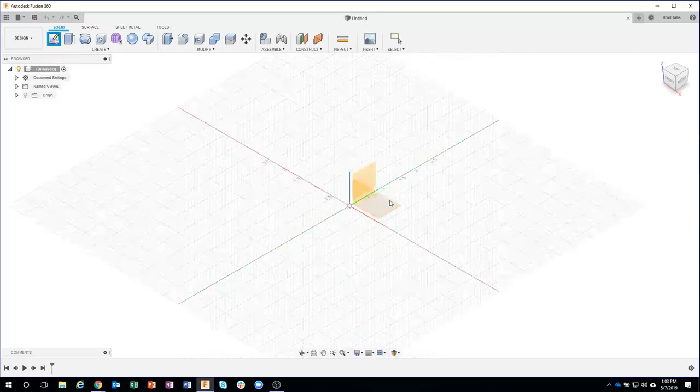So the first thing I'm going to do is, let me jump into Fusion. And I'm just going to start by creating a quick sketch. And I want to create a 1/2-inch diameter bolt, for example. So I'm going to start by just creating a circle. And I'm going to make this 0.5 in diameter. So I type in 0.5, I'll say okay. Let's go ahead and extrude this guy up. And in this case, I'm just going to go like 1 inch, for example. Okay.

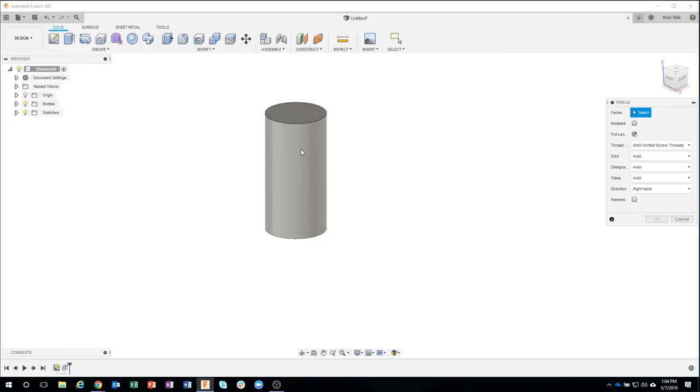Under the Create menu, we have this Thread command. And when I click on Thread, I can go ahead and select this cylinder. Now watch what happens over here. When I click on this cylinder, it actually figures out the closest manufacturable thread. So for example, in this case, I'm in inches, but if I were in millimeters, this would probably show up as a metric thread type. You can see that it determined that a 0.5 is about the closest.

And then we have different designations. So you can kind of see we have 1/2-inch 12 UNS, 1/2-inch 13 UNC. So I'm going to go ahead and do this 13 UNC, and you'll see that this preview updates. Let me go ahead and change it to something like 20. You can kind of see how that updates.

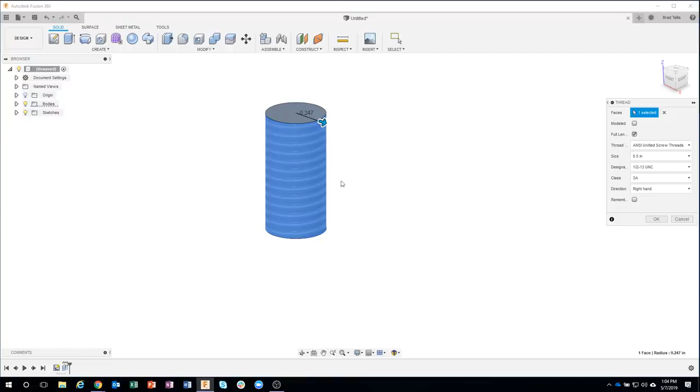Now, if I were to say okay right now, this is just a decal. It's just a sticker, basically, a representation of threads. Now, why would we want to do that? Well, when you have complex designs that might have lots of threads, you wouldn't want to have all of those modeled, but you might want to show that those are threaded rods, for example. So we use this almost like an image.

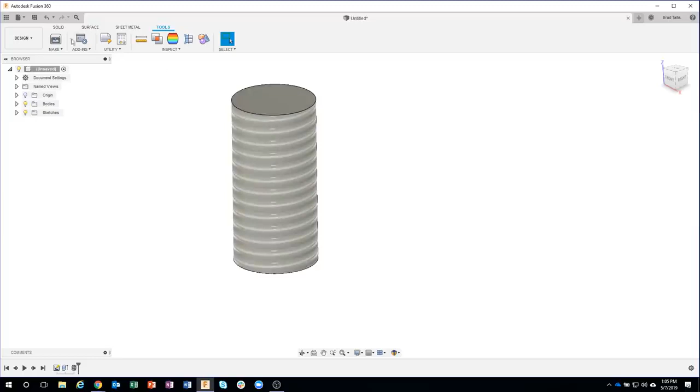However, if I were to come over here and say Make and try to 3D print this, all I would get would be a cylinder because there's physically no threads there. Okay. I'm going to go back into my thread feature in my timeline.

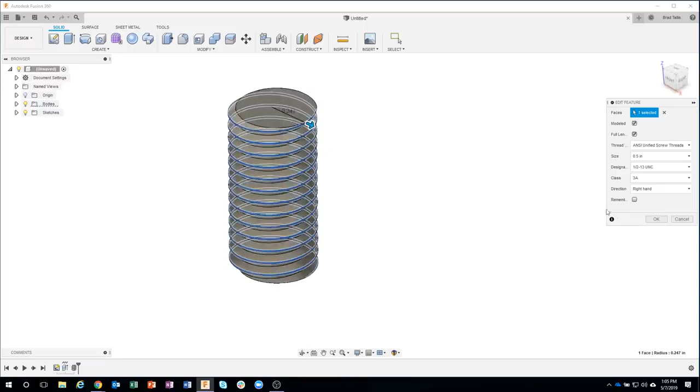Again, I'm ANSI unified, half inch 13, but you'll see right here it says modeled. If I click on that, it's going to physically model the threads. Now, by doing that, we've added a lot more edges, a lot more faces, and this is what I was talking about earlier. If we had a lot of these in our design, it could potentially slow down our session of Fusion. So, actually model the threads only on the ones that you really need to have modeled.

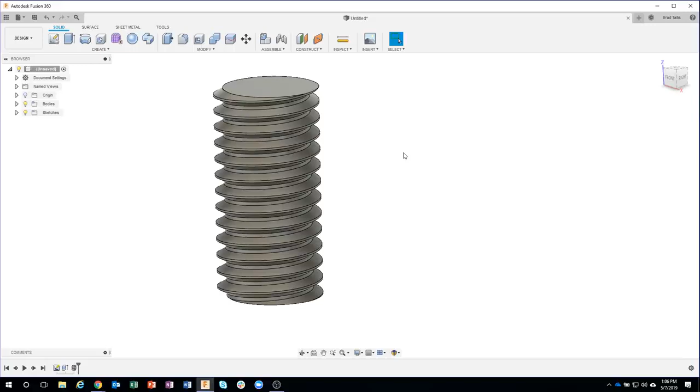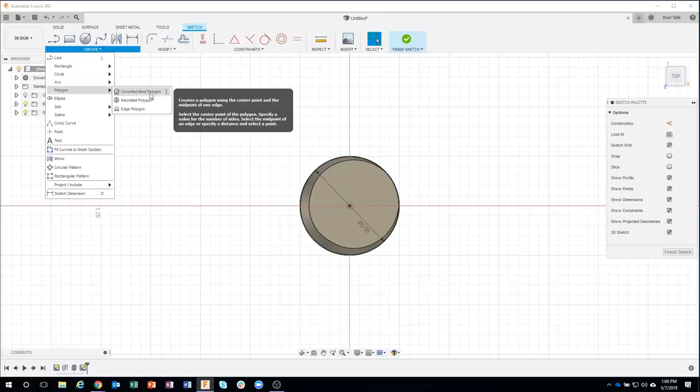Okay. So I'm going to do that again. I'm going to, this time, create a sketch on that plane. I'll do another circle here. Let's just do a half inch. And then I'm going to use a cool command in here called Polygon, circumscribed polygon. Okay. What this allows me to do is I'm going to go ahead and start in the center, and you can see that it's going to basically create a polygon that's circumscribed around the radius of our circle here.

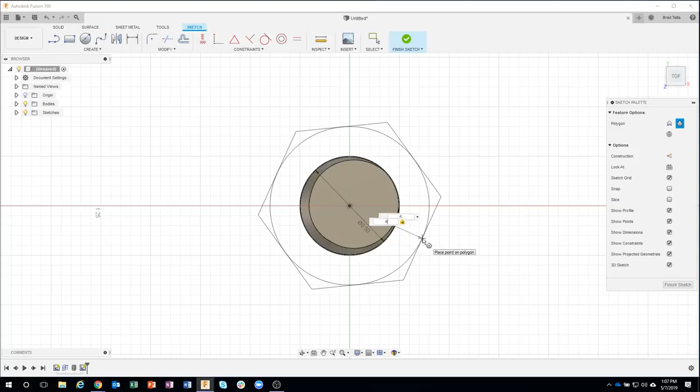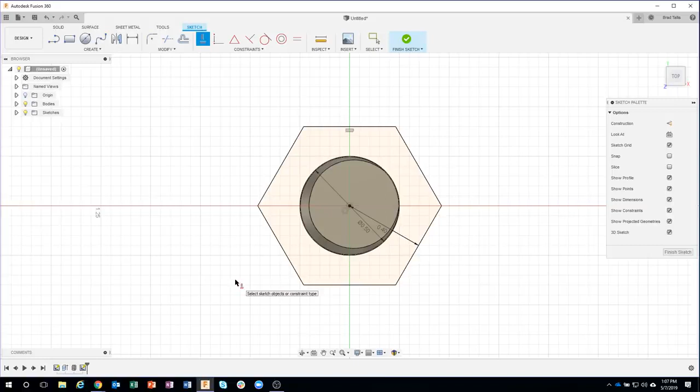So now I can make this nut whatever size I want. Let's just say 0.4 in this case. And I'm going to go ahead and just hit enter, and you can see it created a 6-sided polygon. Now, the anal retentive part of me, I like to have this horizontal, so I'm going to come in here and say horizontal, and I'll just click on that top edge, and you can see how it rotated it to be horizontal, and we are done with our sketch.

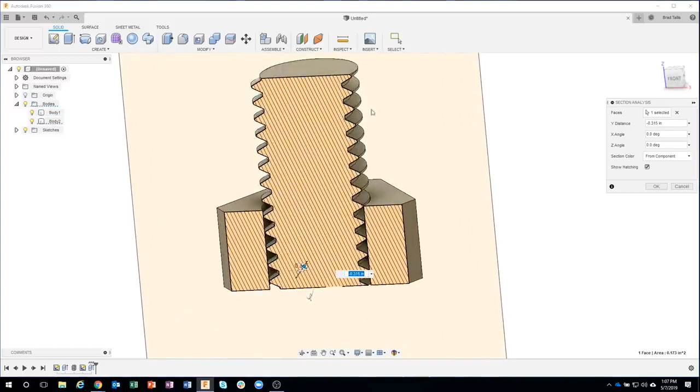I'm going to go ahead and turn this body off. Let's go ahead and extrude this up. And let's just go maybe 0.375 in this case. I'll say OK, and I'll turn this body back on. Now, if I were to section through here, we're going to see an issue. So I'm going to say section analysis, and let's just slice through. And you can see that sure enough, I have the threaded rod, but the nut itself is not threaded.

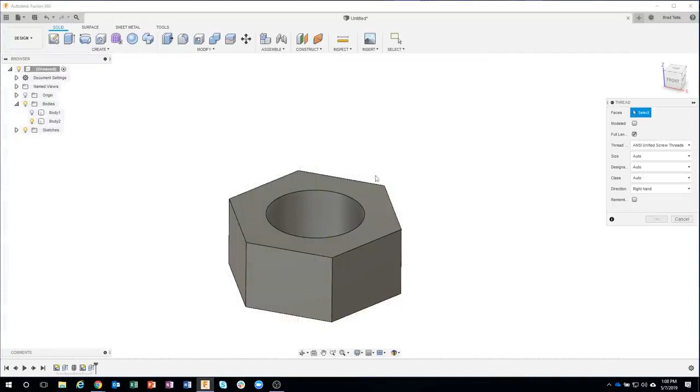So let's go ahead and do the exact same thing. I'm going to say create a thread. Notice the size is set to auto, designation set to auto. I'm going to go ahead and click on that circle, and check this out. I'm going to undo so you can kind of see this. Watch the size of the circle when I do this. Oops, I meant thread, not coil. So watch the size of the circle. As soon as I click on that circle, you see that it actually got smaller. And that's because Fusion is smart enough to figure out how to make it the drill size ready for the tap. So it does all of that for you.

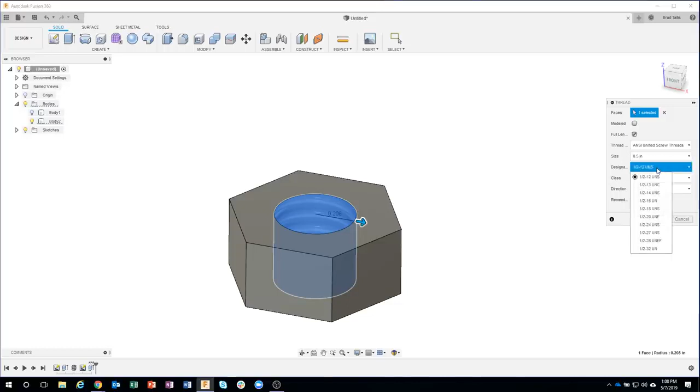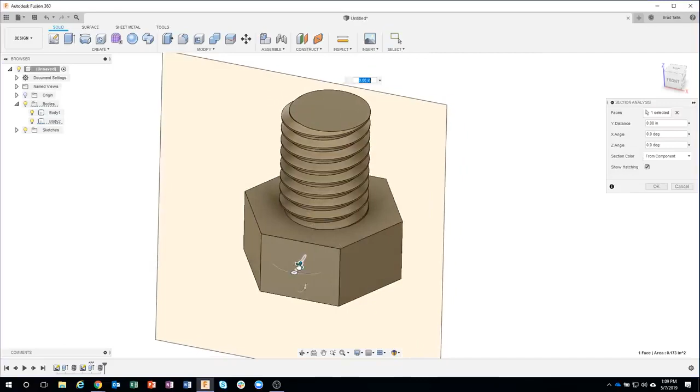So again, half inch. Now I want to make sure I'm doing the half inch 13. And again, I'm going to say modeled because I'm going to 3D print that nut. I'll say OK, and we now have this nut. Let's go ahead and turn this back on again, and I'm going to section through it. Okay, so something like this.

Now here is what I really like about Fusion 360's threads, is you'll notice that there's a bit of clearance in here. And at least on my 3D printer, this seems to be the perfect amount of clearance. Like I showed on this guy, this is pretty much the exact same example. I didn't do any modifications, and I wish you could feel how perfect this is, but it literally just screws in very easily, and there's absolutely no slop. And the reason I'm pointing this out is because I'm going to do the exact same thing, but this time I'm going to import some models from McMaster-Carr.

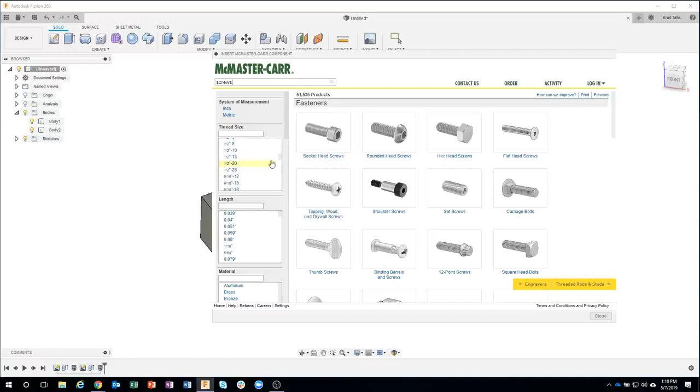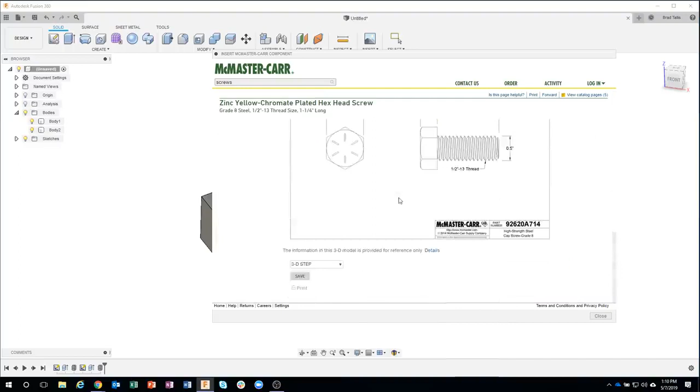Okay, so let's go ahead and come under Insert, McMaster-Carr, and I'm going to make this a little bit bigger. I'm going to click on screws and bolts. I really like how McMaster-Carr has this set up. I can scroll down here and let's just do a 1/2 inch 13, for example. Let's do the hex head screw, and I'll do maybe like 1.25 inches in this case. Okay. I'll click on this product detail. Anything that has this little CAD symbol next to it means there's a 3D model available. Actually, even more than 3D models. There's drawings, 3D models, etc.

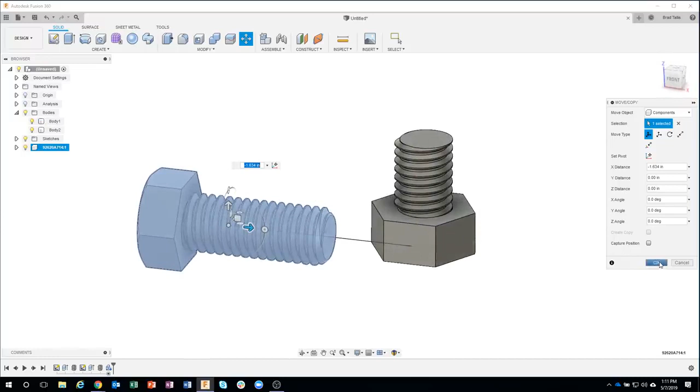So I'm going to just say save. And it's going to bring in the McMaster-Carr one, which I really like because you can even see the markings on it. It's got the cool chamfers, etc. Whereas in my example, I just did one really quick, not that exciting, right? So let's do the exact same thing. I'm going to insert another McMaster-Carr component. This time, let's do a 1/2 inch nut. Let's just do a hex. And let me scroll down here just a little bit. I'll do a 1/2 13.

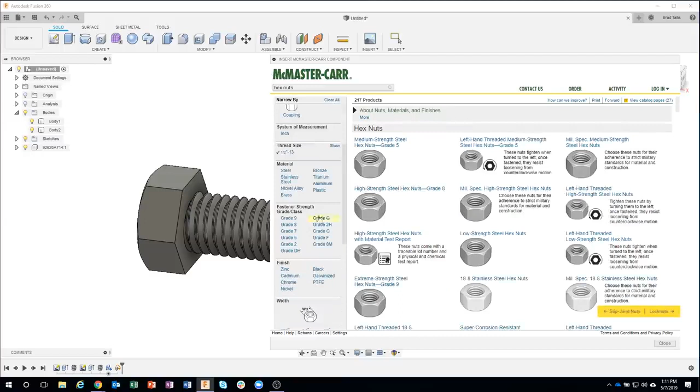Do the exact same thing. Here's a drawing of it. We're gonna save it as a STEP file. And I'm gonna pull that out over here so we can see it's in the wrong orientation. But I can fix that really easily.

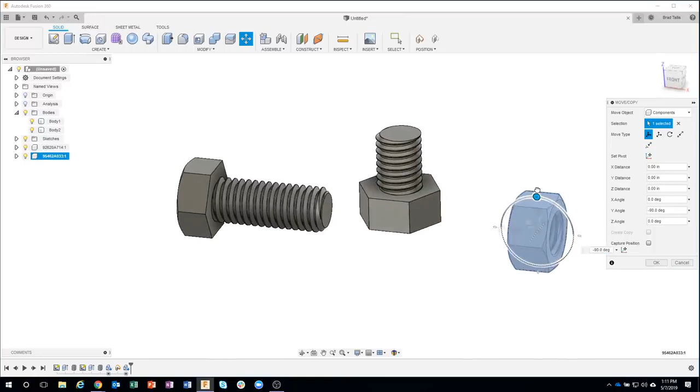So I'm just going to rotate this around. And I'm going to cheat. I'm going to do this point to point. I could create a joint and all that kind of stuff, but in this case, I'm just going to hover over this face. And you can see I can grab this little center point right here. So I'm going to click on that center point.

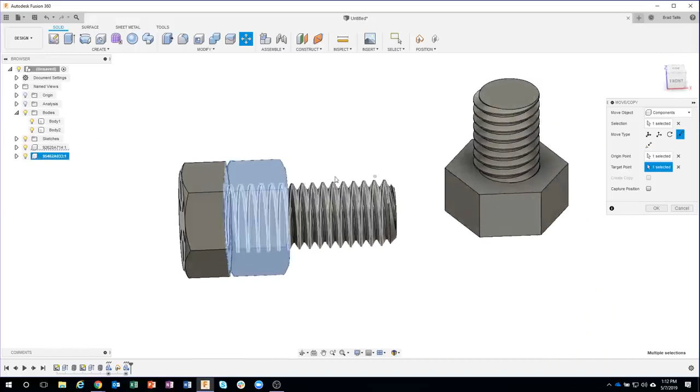And then I'm going to do the same thing over here. I'm going to hover over this face, and I'm going to grab that center point. And just that quickly, I was able to move the nut where it needed to go.

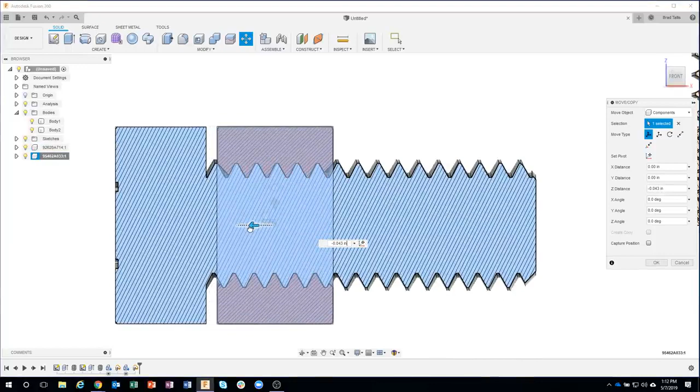Okay, so let's go ahead and turn on our analysis again. Obviously, they're not lined up, so I'm just gonna drag this over really quick. Let me look at it from the front view. And I'm just gonna line up these teeth, just as a visual right now. Now this is what I wanted to point out. Notice how tight those tolerances are compared to what we get over here.

So my first tip is I personally like using Fusion's thread command. Now I am going to show you how you can bring in McMaster-Carr components and put Fusion's threads on there. That's the next thing I'm going to show. But if you just bring in parts from McMaster-Carr or maybe from a customer's site, you might want to do a sample print first before you print the big huge object.

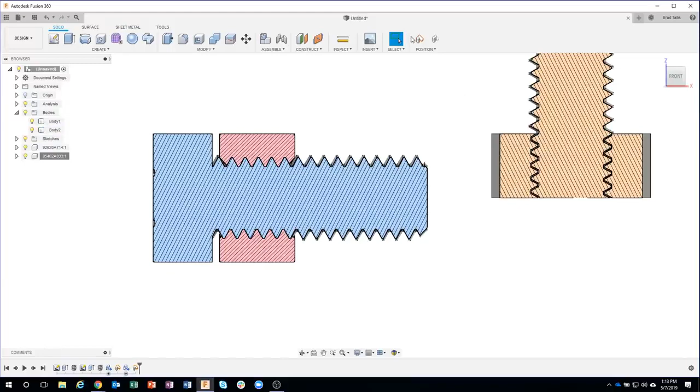I might try printing one of the nuts or the bolts from that particular customer and see how well it fits, and do we actually have to modify it. So that's my first tip. Okay. Now I mentioned that you can actually modify these. So let me go ahead and talk about that.

So I'm going to turn off my analysis and let's just turn off this nut. So here's my McMaster-Carr bolt that we brought in, and I really like it. However, I want to basically recreate the threads on there. So I'm going to select the faces that define the thread. So I'm going to grab those faces there.

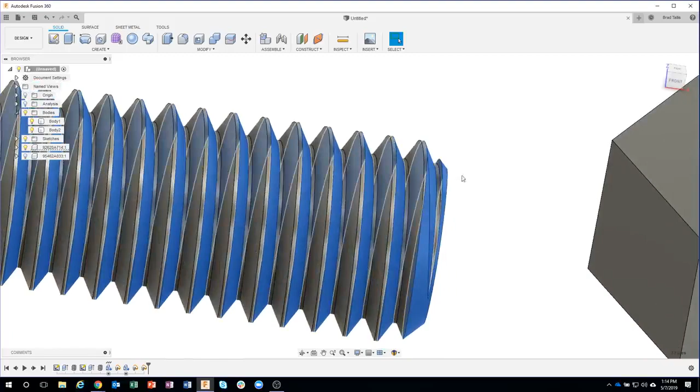I'm going to grab this face here. And then finally, I'm going to grab this inside face. I'm going to have to zoom up a little bit. So you can see I grabbed all of the threads except for this outside one. Okay. Then all I have to do is say delete, and you'll see that it turns it back into a cylinder pretty quickly. So that's using the direct modeling techniques.

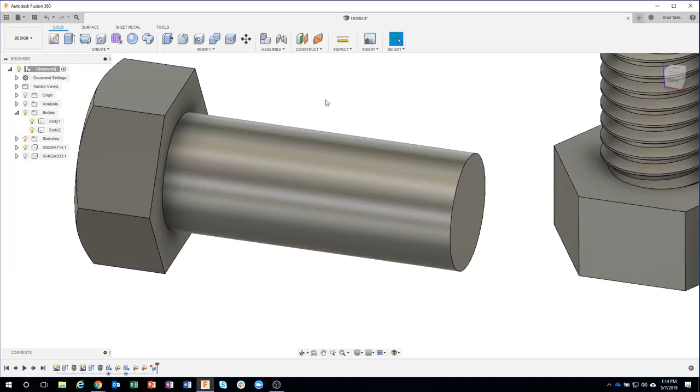Now I can come in and say, let's go ahead and do a thread. I'll click on there. Again, it recognized it as a 1/2 inch. Let's do 1/2 inch 13, modeled, and boom, we're back to having a threaded part that's attached to my McMaster-Carr part. And I could do the exact same thing with the nut.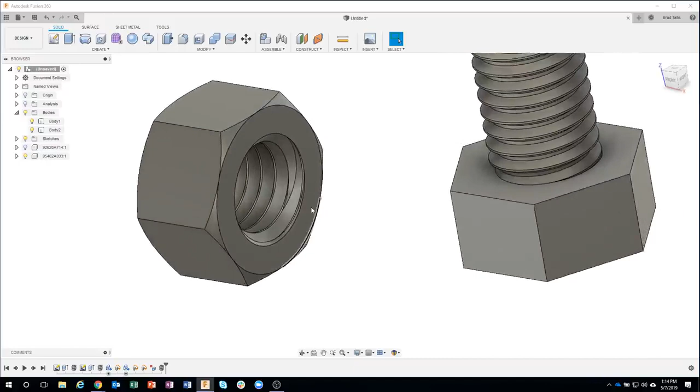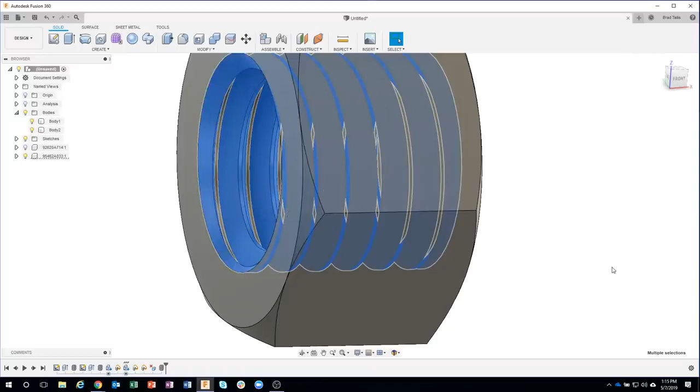So I'm just going to come in here, grab a couple of these faces. So I'm going to grab that guy there, that one there, and this inside one, this guy here. Okay. I might rotate around, make sure I get all of those thread faces like so. I'm just going to hit the delete key on my keyboard, and we're back to having an unthreaded nut. So let's go ahead and say thread, 1/2 inch, 13, modeled.

Let's turn these guys back on. I might have to move the part. Let's go ahead and do an analysis. Yep, I'll have to move it slightly. But let's take a look at the clearance now with these new threads. So you can see, sure enough, we have much better clearance just by recreating those threads.

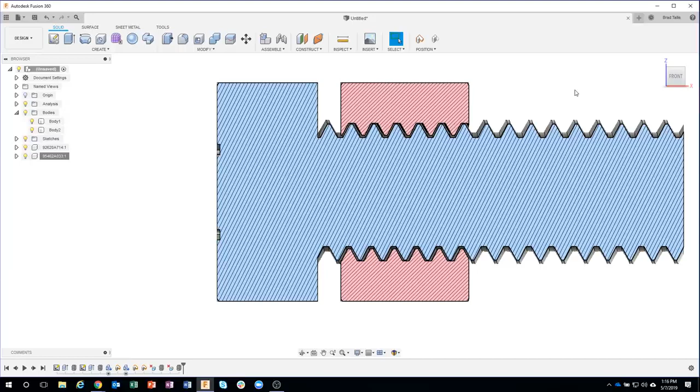Now, let's say you did a sample print and they were still a little bit snug, you can actually modify your 3D model. So for example, on this nut right here, I could come in and grab maybe this face here. I'm just going to do a press pull, and I can move those faces up a little bit.

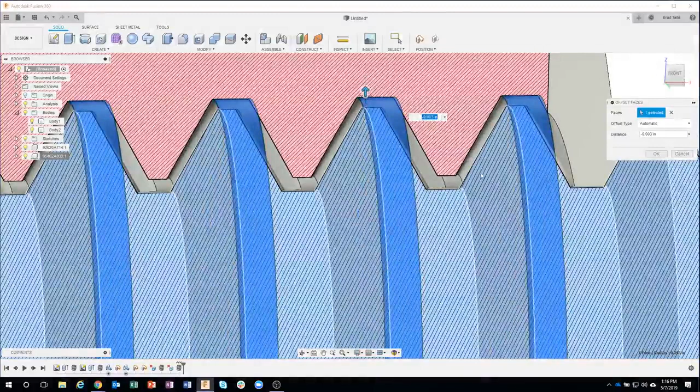So you can see how I'm moving them, 0.003, and I now have more clearance. So you can actually use, again, direct modeling techniques to slightly change what you want those threads to look like for that extra clearance. Okay.

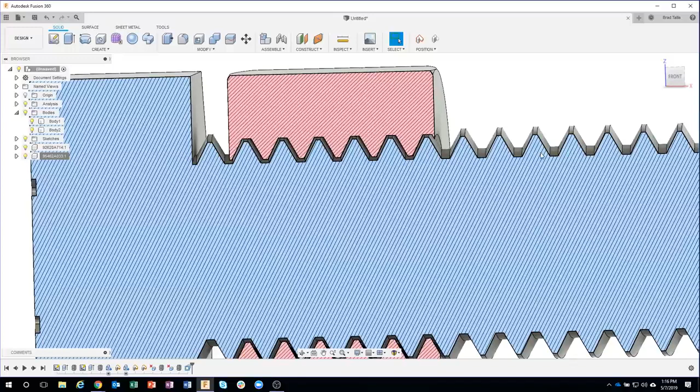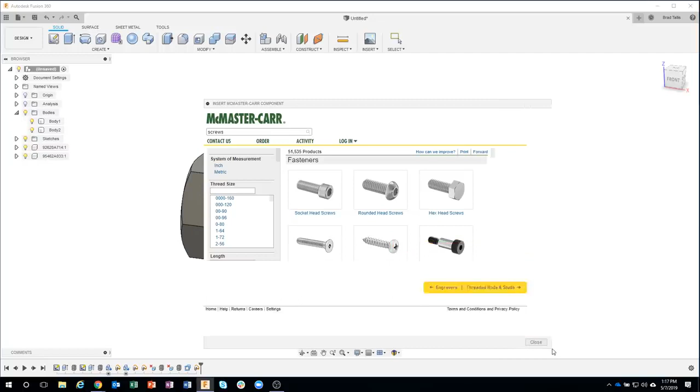Hopefully that makes sense with the thread command inside of Fusion, and also using, for example, a McMaster-Carr part. And like I showed, this works with anything from McMaster-Carr. So I could come in and say, for example, I want a socket head cap screw, something like this. And again, all of the different sizes in here.

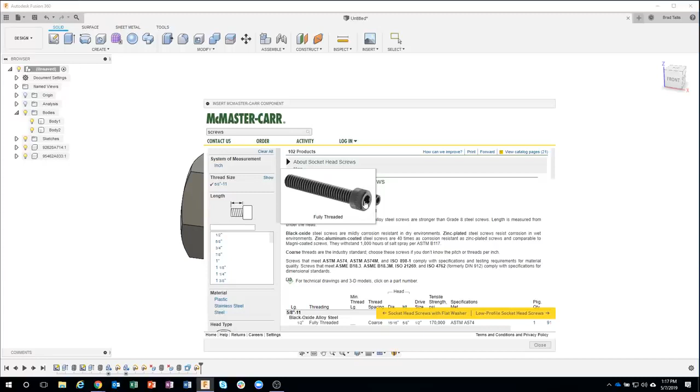And I could delete those threads off of there. I'm not going to go ahead and do it, but it works for pretty much any of these parts, where I wouldn't want to have to model the head geometry. I could just bring it in and then recreate the threads if necessary. Okay.

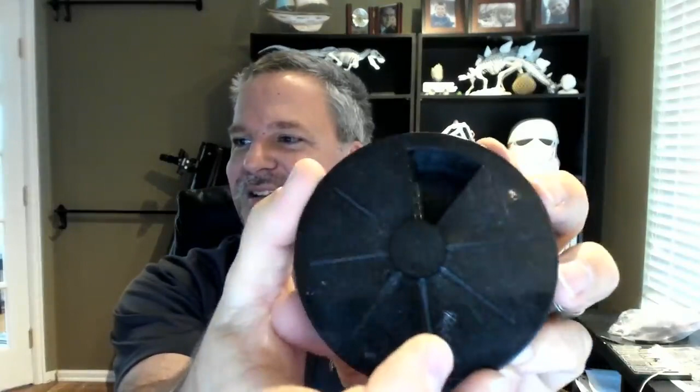So here's a prime example. Here's an object I printed, and I don't know how well it's going to show up on the camera. I apologize. This is actually a pill holder for pills. You can rotate this around, and you can see there's different openings in there. I have to look at my other monitor to see what's going on there. And it's got labels on it, Wednesday, Thursday, Friday, etc.

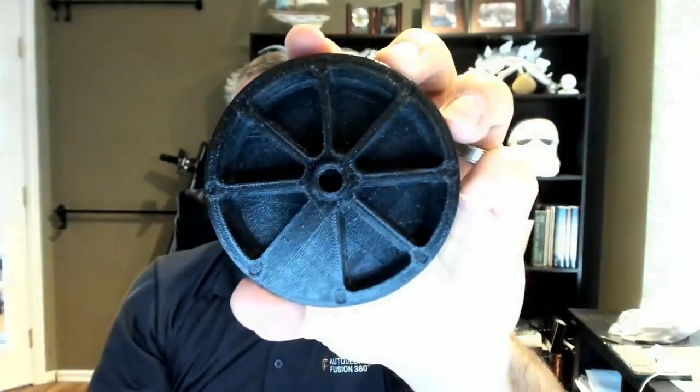So I'm going to unscrew this, and you can see that I actually 3D printed this. So there's the little thumb screw, and it just screws into this little interior post in there. So how do you go about making sure something like this is going to last? And there's a couple different tips and tricks with this.

So the first one I want to talk about is when you print a bolt, you can't really print it sideways, because then you'd have to have support material right here, and that would probably get in the way of the threads. So you typically have to print vertically. Now, unfortunately, when you print vertically, all of the layers are going on like this.

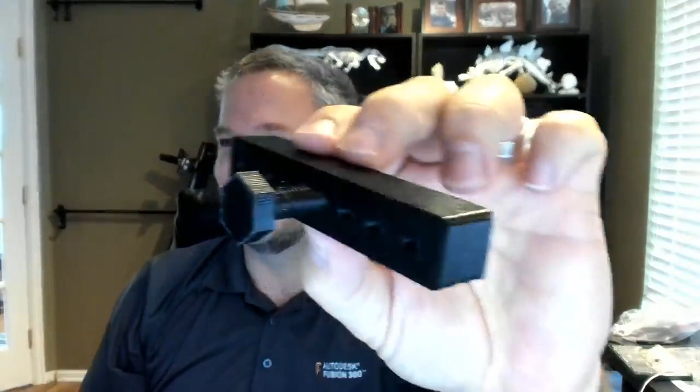So let me just do a quick example here. I have a sample block. Let me zoom up on this. You can see I've got a couple different sized holes in here: a large hole, medium hole, and a small hole. And this is what I was talking about, where I'll print a sample block that maybe takes 20 minutes to print, and make sure that my 3D prints actually screw into there very easily.

If it's too tight, I run the risk of breaking the bolt. So I usually print out a couple sample holes and a couple sample bolts first to make sure it's going to work. Now what's neat is I can use even actual machine bolts and screw these in also. So that would actually screw in and work instead of using a 3D printed one.

So if I'm using real hardware, I will, again, do a sample print, make sure that it fits correctly, and see if I need to offset some faces slightly or not. But in this case, it worked perfectly. And again, I used Fusion 360's thread command to do all of these. And I'll be honest, no modification whatsoever on any of these holes; I didn't have to offset any faces. It's beautiful. You can tell I'm excited about it. But you can see that's definitely in there.

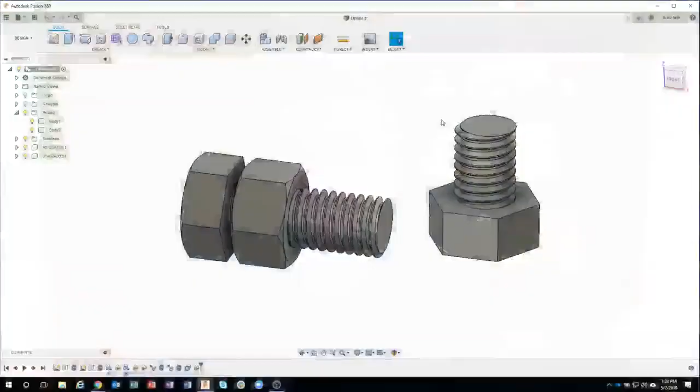The last thing I want to show is what if you need to create custom threads. So I'm going to go ahead, let me clean up my desk here a little bit. Let's go ahead and start with a new design. And I'm going to show you how you can create some custom threads. And again, there's probably multiple different ways of doing this. But I'm going to show you just one method that I've used in the past.

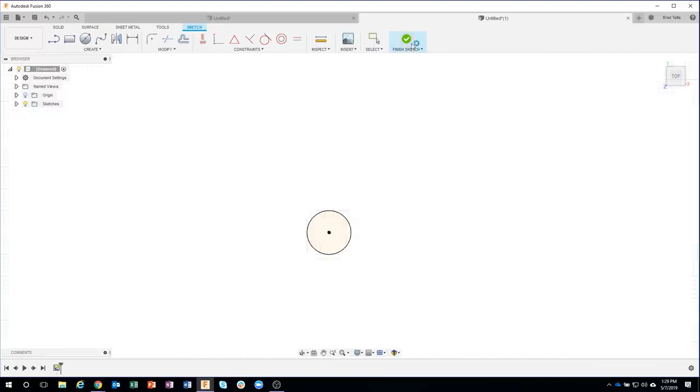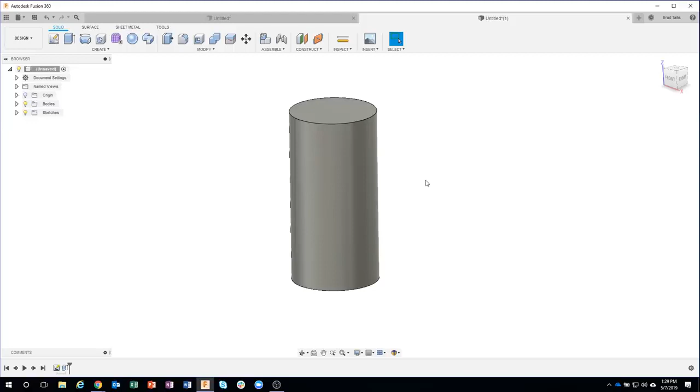So I'm going to make this one a little bit larger. Let's do, for example, like a 1-inch diameter. Like so, and I'll go ahead and extrude this, and let's just go maybe 2 inches tall in this case. Okay, so this is pretty much the envelope of the size that I want to create these custom threads. We're going to learn a new command in here called Coil. So I'm going to say create coil.

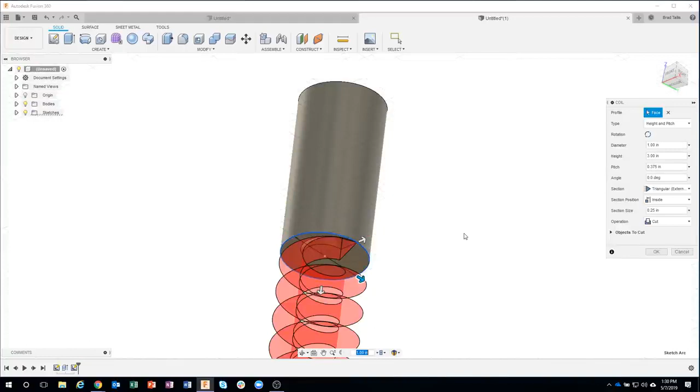First thing it's asking for is which plane or face do you want to draw it on. So I'm going to start down here on the bottom. And then it's asking for a size. So I'm basically going to trace over. So I could type it in or I could just click, and you'll see that I get this interesting result here. Okay. Now I'm going to change the direction of it. Let's see. Let me do that again. Create coil.

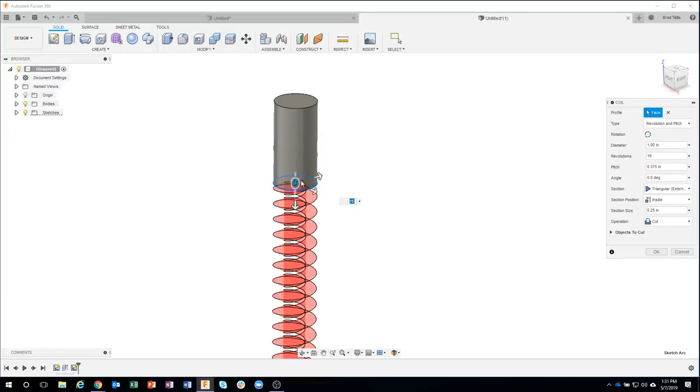And I was going to try and set everything to the default here. So usually it's set to revolution and pitch. And then you can kind of see, for example, let me go, nope, wrong. Try and make it go in the up direction. I did this earlier, but I'm not sure why it's not doing it. Let me see if, no. Come on. There we go. I must not have clicked correctly.

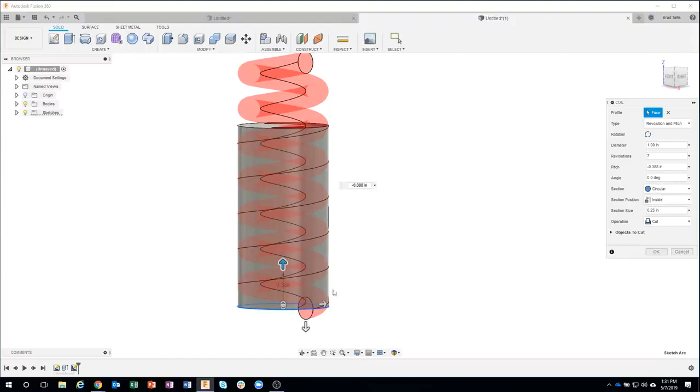Okay, so by default, it's usually set to circular. Okay, and you'll see that we get this red preview going on. And what it's basically doing is it's taking a circular section and it's creating a coil. Now, there's lots of options here, and I was going to kind of walk through each of these. So you'll see, for example, we have revolution and pitch. So I could specify I only want 4 revolutions, and it's only going to go around 4 times.

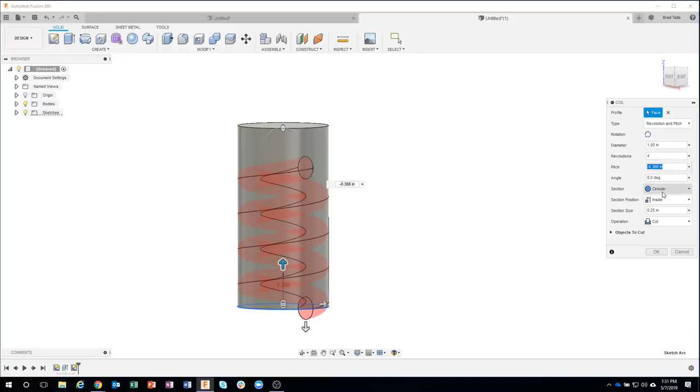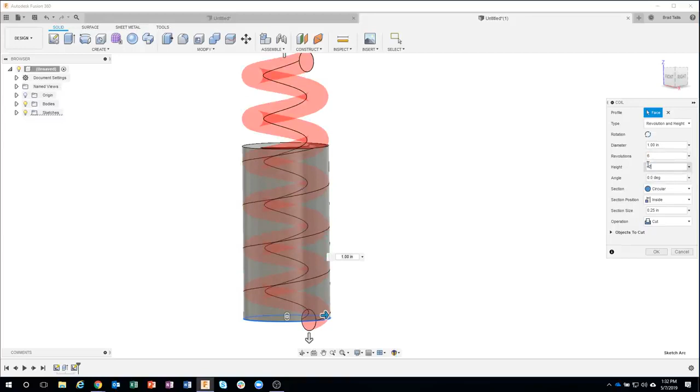I can also specify the pitch. So for example, I can say minus 0.5, and it's going to set the pitch to be 1/2 inch. If I said 0.75, it's obviously going to space out that pitch even further. Okay. We also have revolution and height. So I could say, for example, I want 6 revolutions over 2 inches, and it's going to figure out the pitch for me automatically, right? If I said I want 4 revolutions, you can see how it's going to do that, but it's going to keep the height always the same.

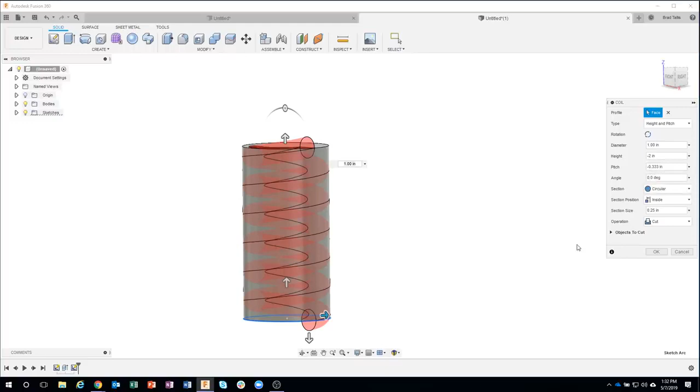Okay. Then we have height and pitch, where you can specify what's the height, and then you can specify what's the pitch. And then finally we have spiral, which is just a spiral on a flat plane, which doesn't make sense in this case. So I'm going to do revolution and height in this case. I want 6 revolutions over 2 inches.

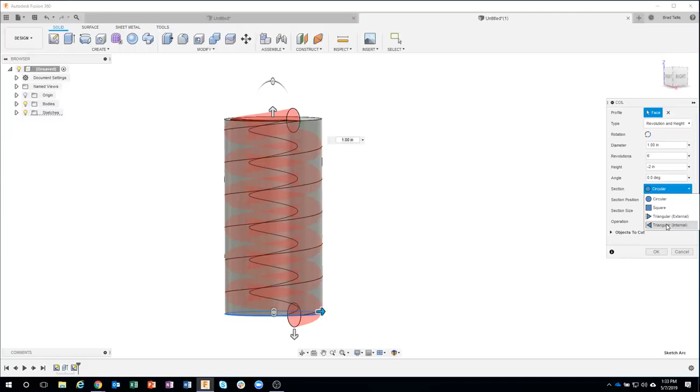Then you see we have this section, and right now there's only 4 options in here: circular, square, triangular external, and triangular internal. And you might be saying, well, how are we going to create these custom threads? Well, I kind of cheat. I'm going to go ahead and use, for example, this triangular external.

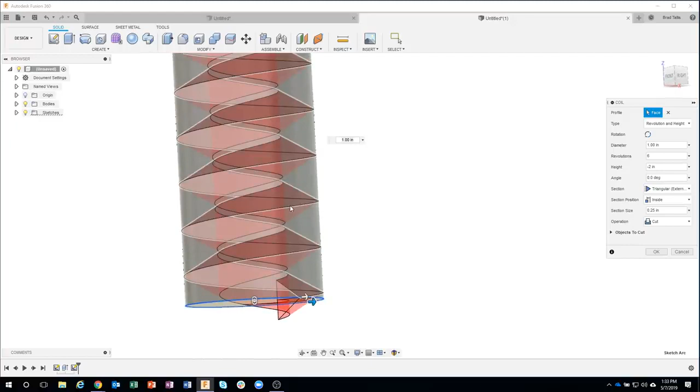And if we look really closely, we can see that the point is defining this little edge right here, this spiral edge, which is touching the edge of our part. It's kind of hard to see, but I'm hovering over the spiral edge right now. I'm going to move away. You can kind of really see it spiraling around.

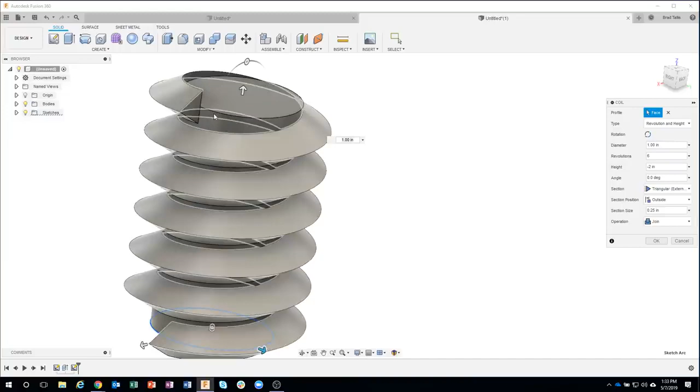Okay. Then we have options for on center, outside. So you're going to see how it's basically taking that profile and starting it on the outside of our cylinder. Or we have on center where it's in the center of it, or we have inside. And this is the one I'm going to use.

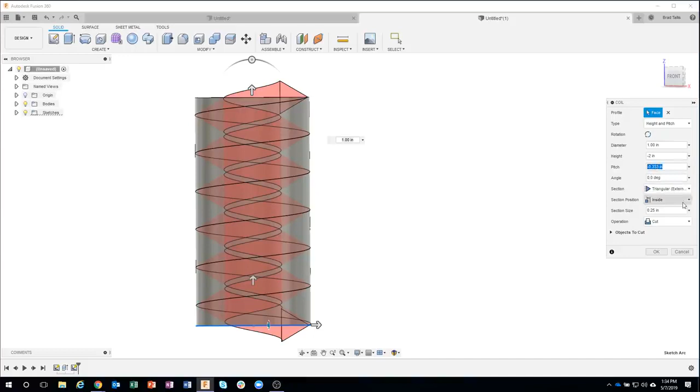So basically what it's doing is I'm able to specify how many revolutions, how high do I want that to be, or I could specify, for example, height and pitch. Maybe I'm more concerned about the pitch of my threads, which is what you typically do. So I'm going to come in here and say I want the pitch to be, let's just say minus 0.35 in this case. And you'll notice it's going to change how many revolutions.

So if I say 0.5, it's still only going the 2 inches tall, but I now have the different number of revolutions. Okay, so I usually use height and pitch because I'm really concerned about the pitch of my threads.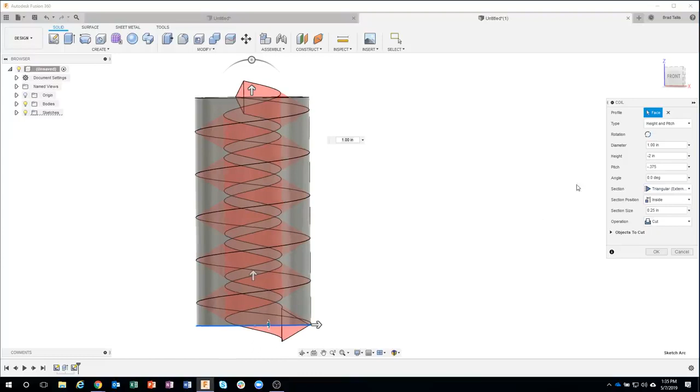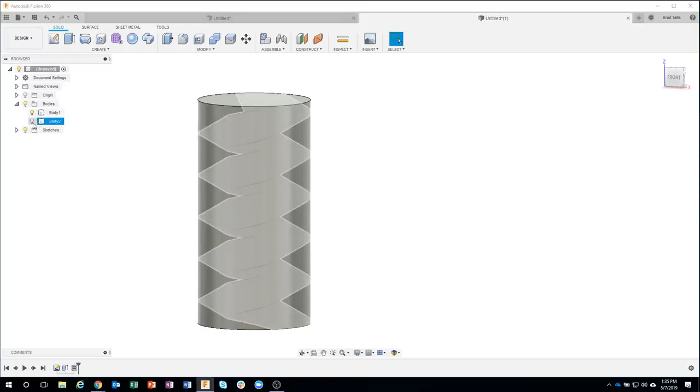So I'm going to go ahead and instead of saying cut, I'm going to make this a new body. And now you can really see the spiral. And if I were to expand open my bodies folder, you'll see that we have this new little spiral part. Okay? If I turn off the spiral, we see we still have basically the bolt that I want.

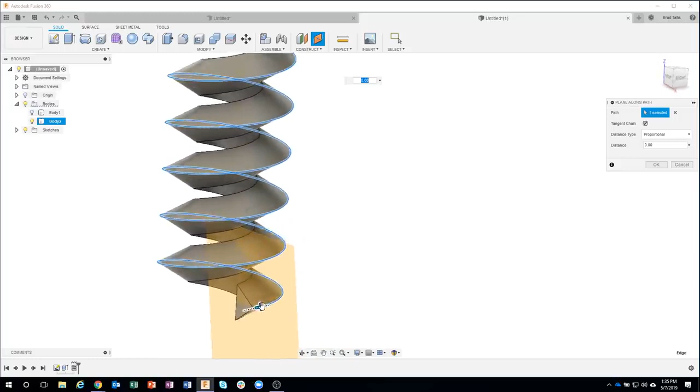Now what I'm going to do is create a plane along a path. And now you can see this path that we defined. I'm just going to drag that to the very end because I want to have this plane be tangent to the end of this line. So I just did a construction plane along a path. I've shown this command before in some of my other live streams. I use it a lot.

And then I just clicked on the path, and then it allows me to place this plane anywhere I want on that path. So I'm going to put it down here at the very end and say OK. And now I have a plane that I can sketch on. So I'm going to say create sketch. I'm going to do kind of a funky profile here. Let's do maybe like a slot. So I'm going to do a center. Let's just do maybe a profile that looks something like this for whatever reason.

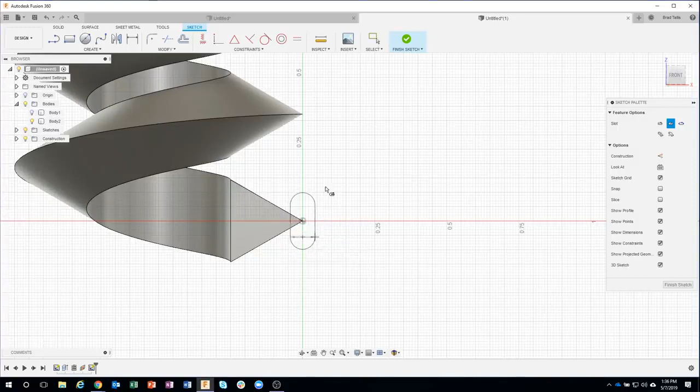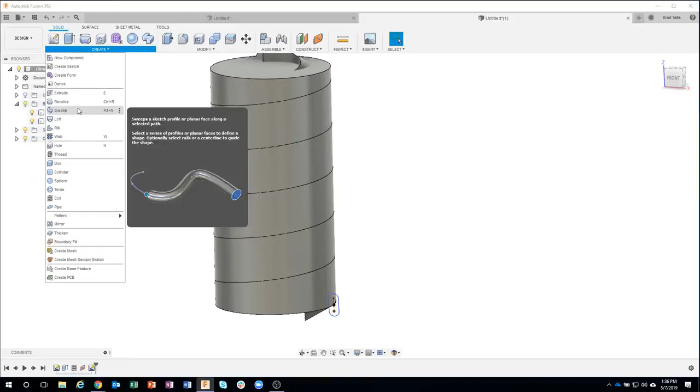Okay. So I'm going to turn my body back on, and now you can see that I was able to create basically a spline that goes all the way around my cylinder. I've got my profile on there now, and I can come in and say sweep. Again by default it's usually set to single path. What's my profile? I'll click that as my profile. And then what's my path? I can click on the edge of this body right here. So you can kind of see how I was able to use that triangle to define that. So that's why I like to set it to the inside, because it kind of just creates that for me.

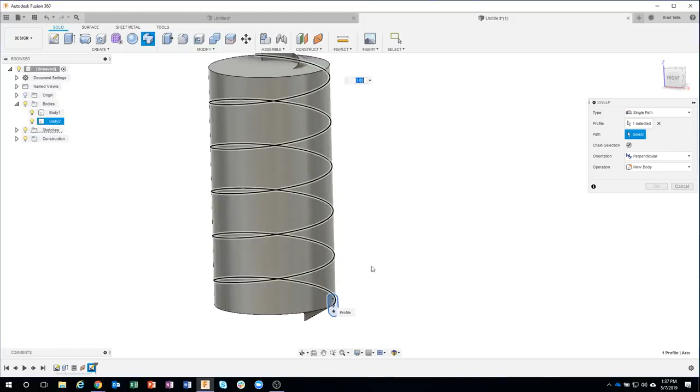Now, for those that are observant, you'll notice an issue here. Fusion's doing exactly what I told it to. I'm telling it to sweep this profile along that spline, but you'll notice as it does that, it's actually physically rotating it. You can kind of see it by the preview that we're getting. It's almost flipping it upside down by the time it gets to the top here. And this is obviously not what I want.

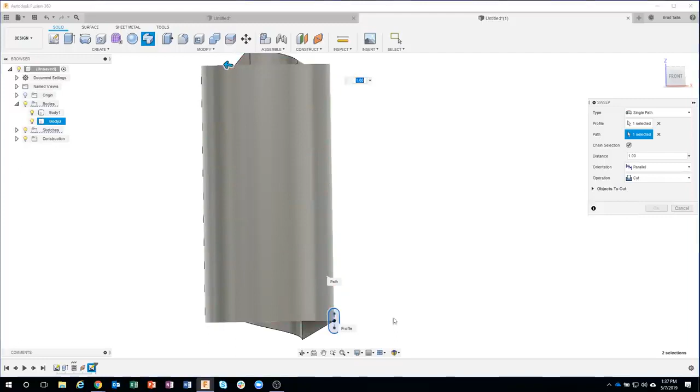I could come in here and say parallel, but that sometimes doesn't work. So you'll see, sure enough, it couldn't do that. Region of the path is not parallel, so it wouldn't let me do that. So I have to say perpendicular, but it gives me that weird result. Well, here's a neat little tip.

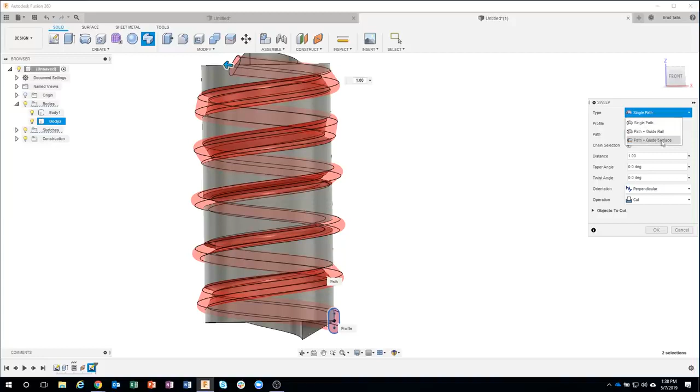If I go under the type, instead of just single path, I'm going to say path and guide surface. So I'm going to click on guide surface, and here's my profile, here's my path, and then the guide surface is going to be the cylinder there. And now you can see how it's going to keep that upright using this blue part basically as the guide.

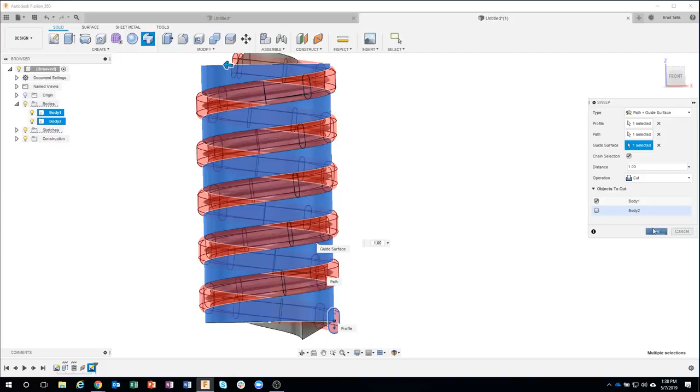And then the last thing I want to do is I want to make sure I'm only cutting my cylinder. So I'm going to turn off body 2 so it doesn't cut through the other one for me. And let's turn that guy off. And I now have a custom profile that's at the correct pitch, because I was able to specify I wanted 0.375 for my pitch. And so you can create some pretty interesting custom profiles.

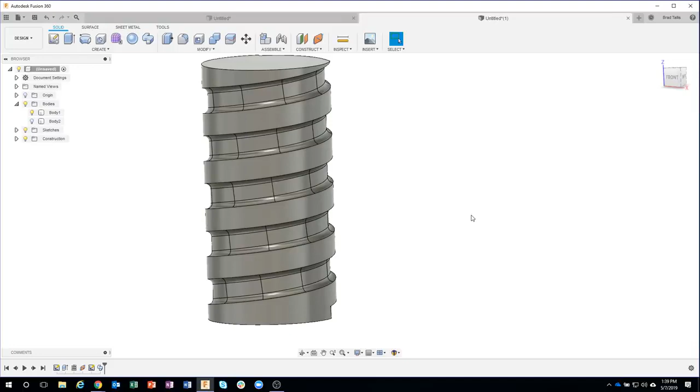Okay, that's all I really had for my tips and tricks for 3D printing threads. Just a quick review. I personally recommend, oh actually I forgot to show you one more thing, I apologize. I showed how fragile that one bolt was when I tried threading it in, and then it just sheared right off because we were printing layer by layer like this. But I told you you can't really print, let me get a better bolt here, you can't really print it on the side because you'd have to have support material there.

Well, here's a neat little trick. You can actually print a bolt that looks, it's kind of hard to see, let me kind of rotate it around, that it's actually flat, okay? It's only got threads on part of it. There you can kind of see the reflection. So I was able to print this flat on my bed, and the layers are printing in this direction. So, you know, it looks kind of weird, right? But it actually still threads.

Let me see if I can do this live without light. Give me just a second there. There we go. So you can see that I'm still able to thread that on there, and it works perfectly, okay? And it's extremely strong. I can't break that. I mean, I could if I had pliers or something like that, but it's extremely strong because of how this was printed. So if you do need a 3D printed bolt for any reason, you could go ahead and do one like this. And it's as simple as basically just machining away what you don't need.

machined. Oh, and I wasn't sharing my screen. Sorry, guys. Let me back up. Oh, the joys of live streaming.

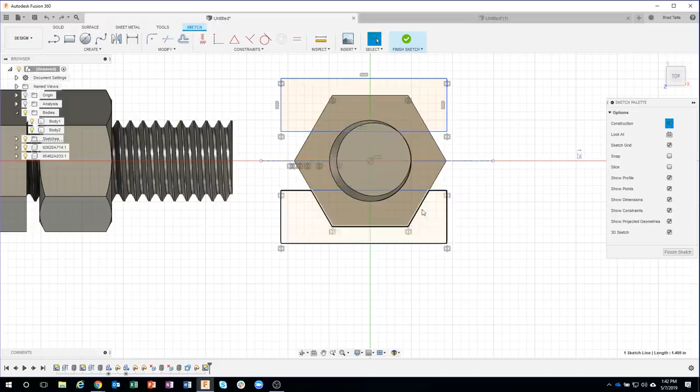Okay, so I just created a rectangle that kind of overlapped the threads a little bit. I drew a horizontal line right here, made that construction, and then mirrored that over, and said finish sketch. Then I just came in and selected my profiles that I want to machine. And again, it's kind of hard to see, but you'll notice that there's a profile right here that's missing. So I'm just going to click and hold for about a second, and I can actually probe through.

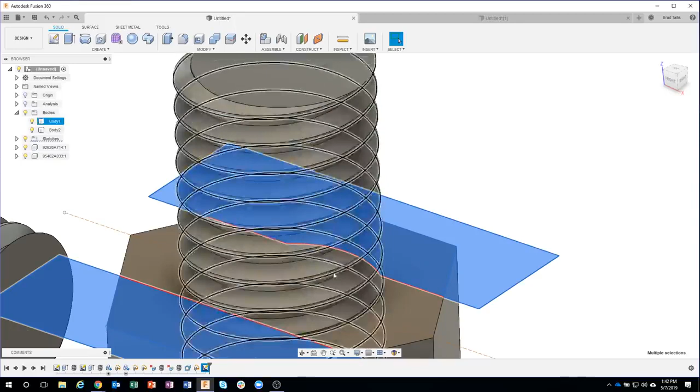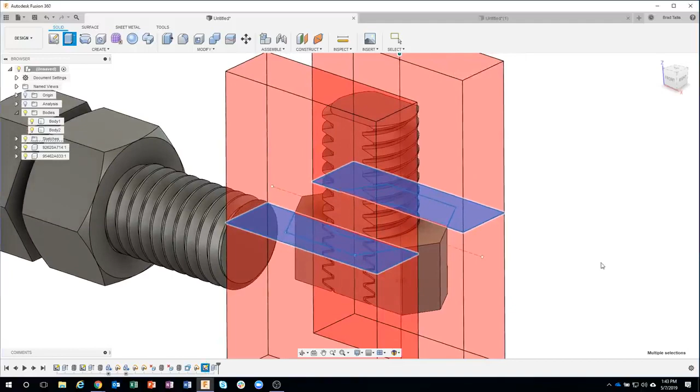I'm going to click and hold for about a second. I can probe through and grab that profile, and I'll say extrude, like so. And you can see how it's going to physically flatten that off. And then I'll go ahead and do the same thing. I'll just say symmetric, say OK. And of course, these are two, you know, a nut and a bolt, but hopefully you get the idea.

Now I could 3D print this flat. And there's still enough geometry here for it to print the threads on both sides. And it's going to create that particular shaped bolt that I showed earlier, like so. And this totally works. So definitely recommend doing that if you can. It looks a little bit different, but it does work. So anyways, I apologize for that little hiccup there. Hopefully these tips and tricks were useful for you.